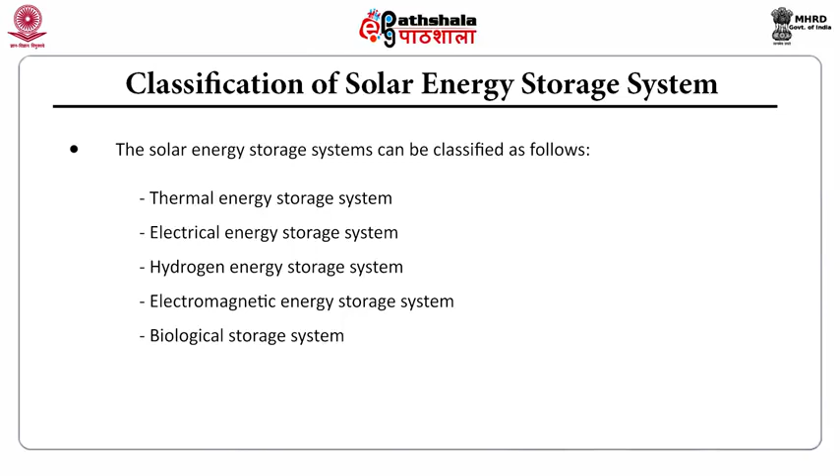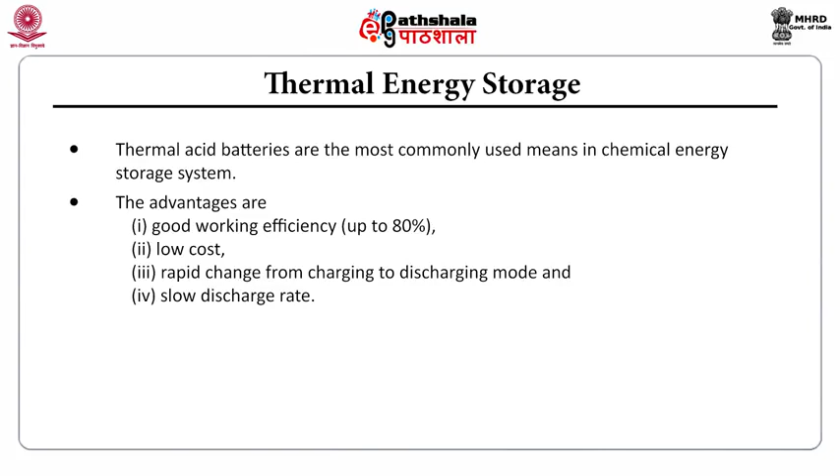There are different types of solar energy storage system. It can be classified as thermal energy storage system, electrical energy storage system, hydrogen energy storage system, electromagnetic energy storage system, and biological storage system. Thermal energy storage system. The lead acid batteries are the most commonly used means in chemical energy storage system. The advantages of this storage are good working efficiency up to 80%, low cost, rapid change from charging to discharging mode, and slow discharge rate.

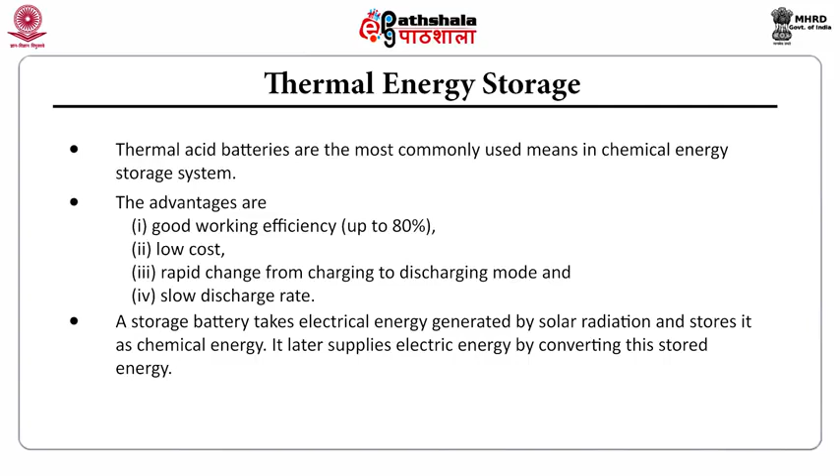A storage battery takes electrical energy generated by solar radiation and stores it as chemical energy. It later supplies electric energy by converting this stored energy. Electrical energy storage. A capacitor is used to store electrical energy in an electrostatic field when it is charged. A capacitor of large capacity is required to store a significant amount of energy. Hydrogen energy storage. The electrical energy is used to decompose water, splitting the water by the electrolysis reaction into hydrogen and oxygen. These substances can be combined to release the stored energy when required.

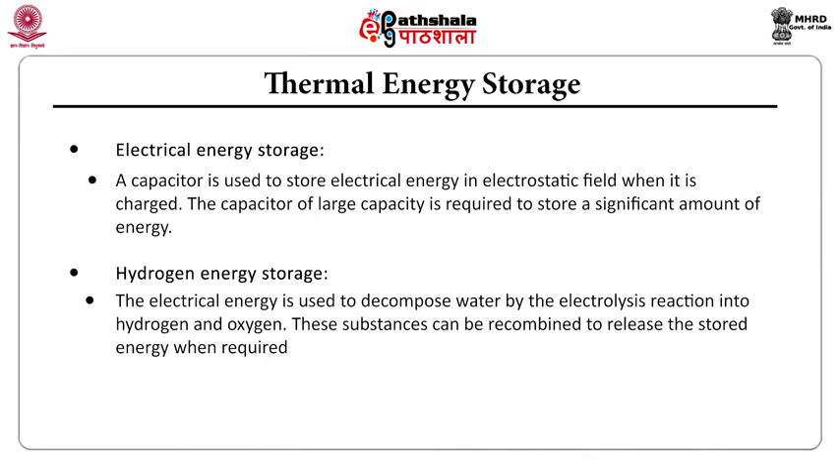Electromagnetic energy storage. The electrical energy is used to store energy in a magnetic field. The resistance of the coil wire is made almost negligible so that the stored energy in the coil is not dissipated, and stored energy in the magnetic field can be maintained indefinitely. The electromagnetic energy storage requires the use of superconducting materials. These materials develop almost zero resistance to electricity flow when cooled below a critical or transition temperature. This method is also known as superconducting magnetic energy storage. And the electric energy can be recovered when the coil is discharged.

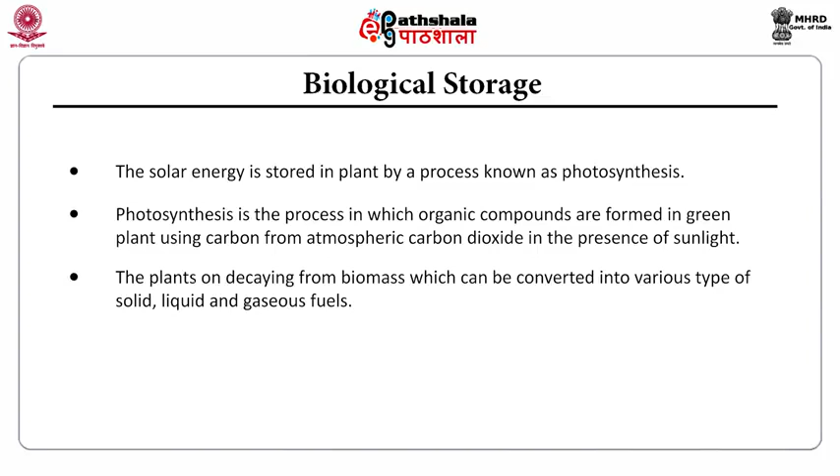Biological storage refers to solar energy stored in plants by the process of photosynthesis. It's the process in which organic compounds are formed in green plants or green algae using carbon from atmospheric carbon dioxide in the presence of sunlight. The decaying plants from this biomass can be converted into various types of solid, liquid and gaseous fuels.

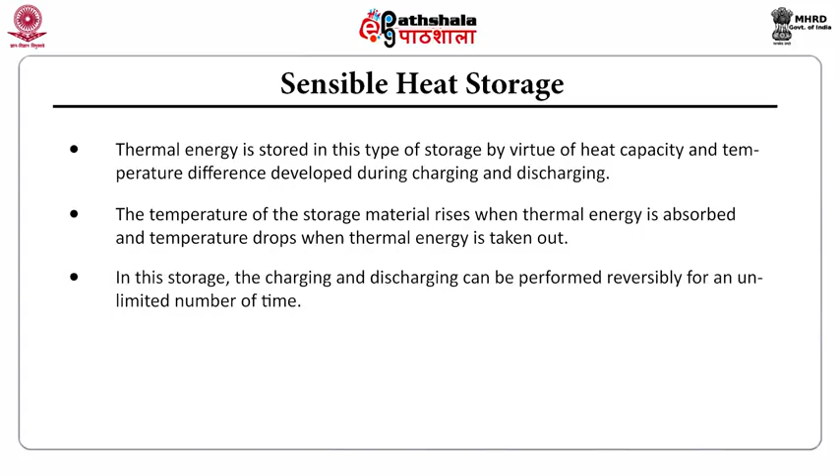Sensible heat storage. The thermal energy is stored in this type of storage by virtue of heat capacity and temperature difference developed during charging and discharging. The temperature of the storage material rises when thermal energy is absorbed and drops when thermal energy is taken out. In this storage, the charging and discharging can be performed reversibly an unlimited number of times. The sensible heat storage can be liquid media storage or solid media storage.

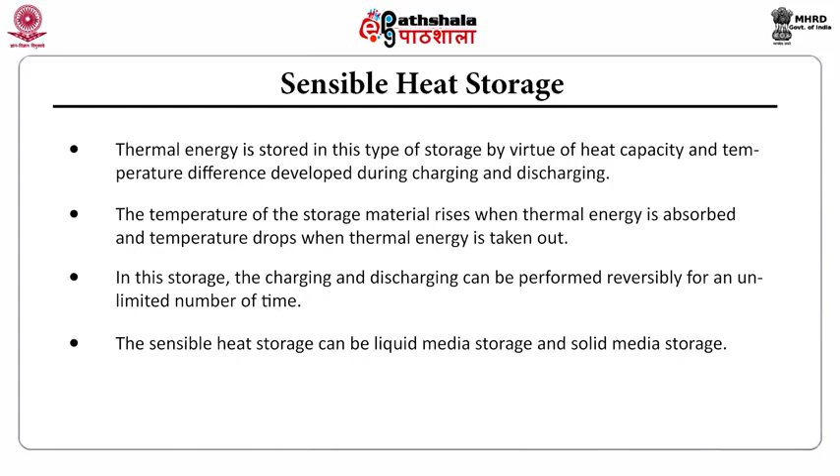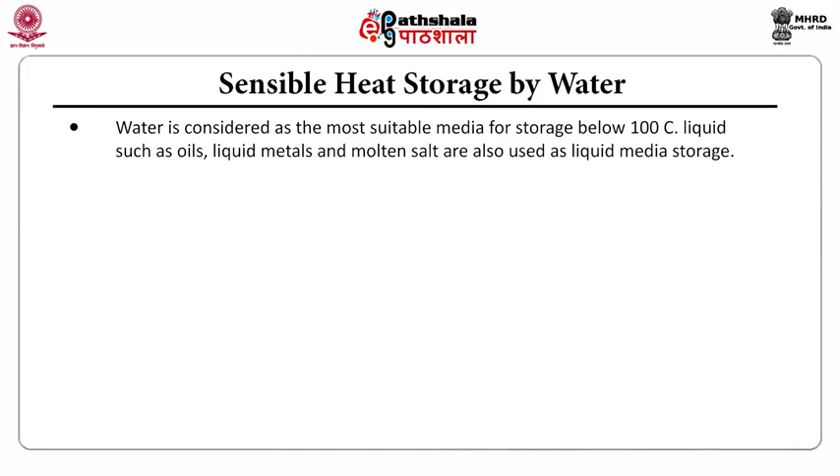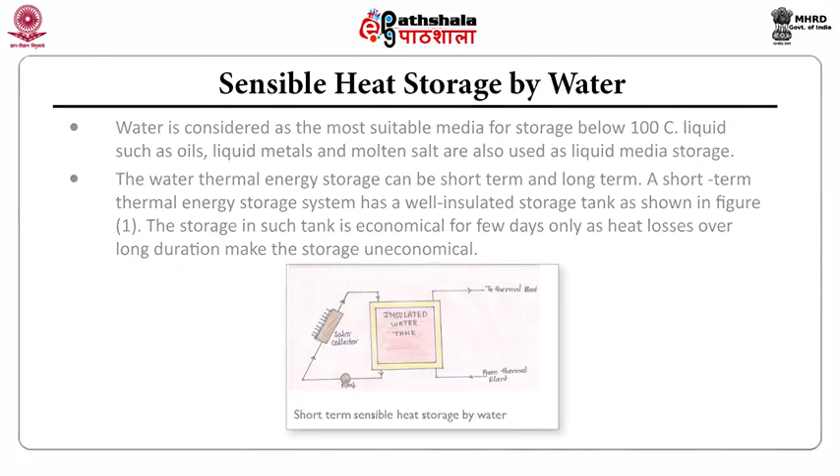We will see the sensible storage of heat by water. Water is considered the most suitable media for storage below 100 degrees Celsius. Liquids such as oil, liquid metals and molten salt can also be used as liquid media storage. Water thermal energy storage can be short-term and long-term. A short-term storage system has a well-insulated storage tank as shown in this figure. Storage in such a tank is economical for a few days only, as heat is lost over long durations, making the storage uneconomical. Long-term sensible heat storage by water is possible in underground reservoirs having special insulation.

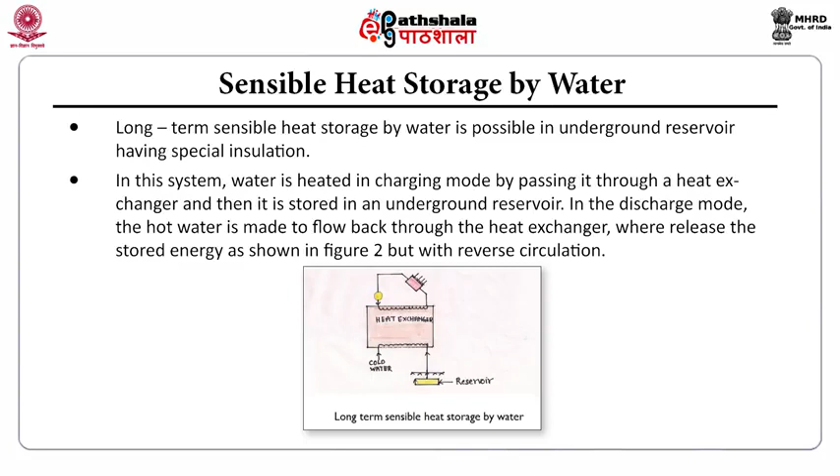In this system, water is heated in charging mode by passing it through a heat exchanger and then it is stored in an underground reservoir. In the discharge mode, the hot water is made to flow back through the heat exchanger where it releases the stored energy as shown in this figure, but with the reverse circulation.

And the advantages of this storage system are: abundantly available, inexpensive, high specific heat which enables to store more heat per unit mass, low viscosity requiring less energy to pump through the pipe system, can be used for both storage and working medium, and is stable with no harmful effect.

But disadvantages are it has limited temperature range of 0 to 100 degrees Celsius, it results in corrosion of pipes and can leak easily as it has less surface tension.

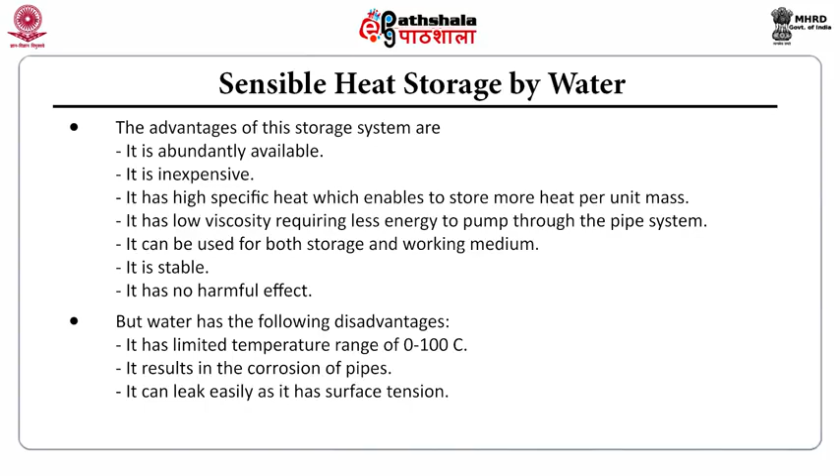Solid media storage or packed media storage. This type of storage has a bed of loosely packed solid materials such as rocks, sand, concrete, pebbles and metals to store sensible heat. A fluid such as air is circulated through the bed to remove the heat from the storage.

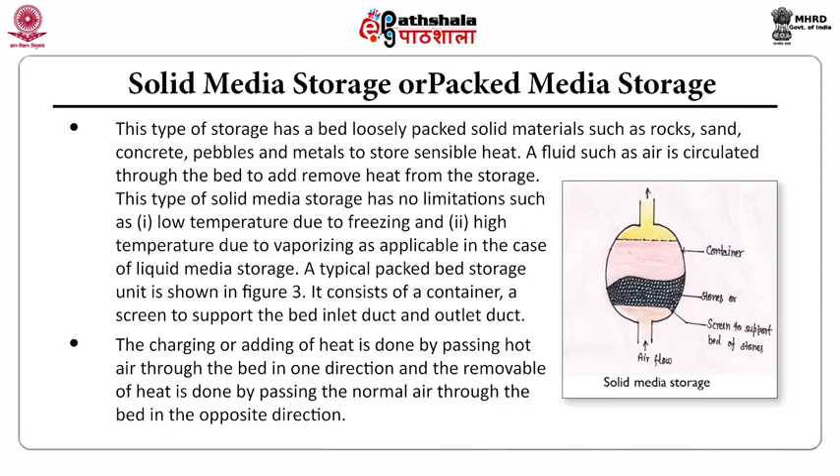The advantages of this solid media storage are: the stones or pebbles are abundantly available, low cost, non-combustible, easy to handle, the possibility of high storage temperature, no freezing point during the heat removal, no corrosion problem, no requirement of a heat exchanger. But it has disadvantages like the size of the storage container is large, simultaneously charging and discharging of energy is impossible in this media, and large pressure drop needs a high capacity air blower.

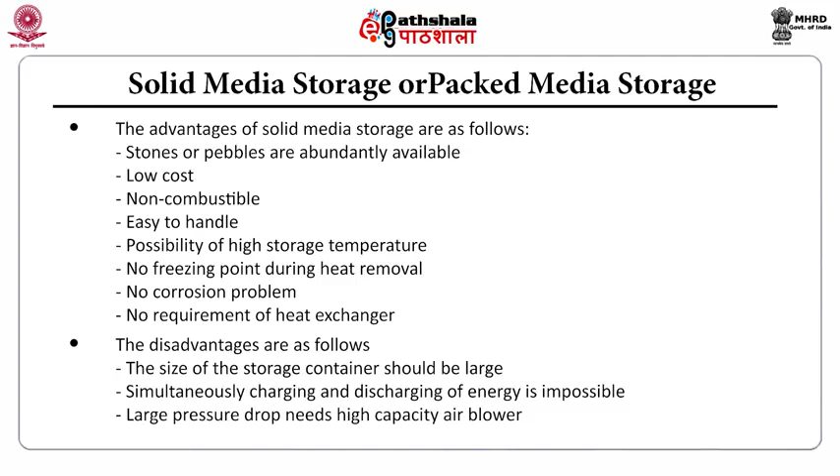Latent heat storage. In this storage, heat energy is stored by virtue of latent heat, which is required to bring about phase change of the storage medium. The heat required to bring about phase change of a material is much larger compared to the sensible heat change of the same material. The phase change of a material also involves absorption or release of a large quantity of heat energy at a constant temperature, which is impossible in the case of sensible heating. Therefore, latent heat storage system is more compact for a certain heat storage compared to sensible heat storage.

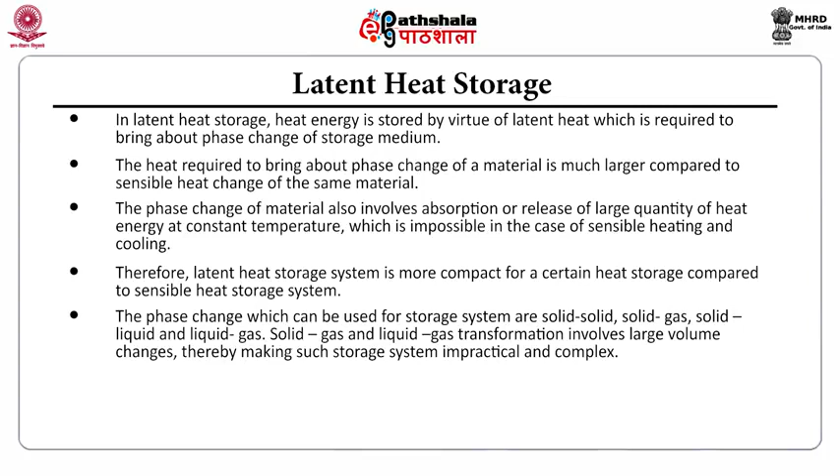The phase changes which can be used for storage systems are solid-solid, solid-gas, solid-liquid and liquid-gas. Solid-gas and liquid-gas transformations involve large volume changes, thereby making these systems impractical and most complex. But solid-solid transition involves transformation of the material from one crystalline form to another, thereby resulting in the transformation with small volume changes. Hence, such storage systems are practical and preferred in spite of small changes in latent heat possible during this transformation.

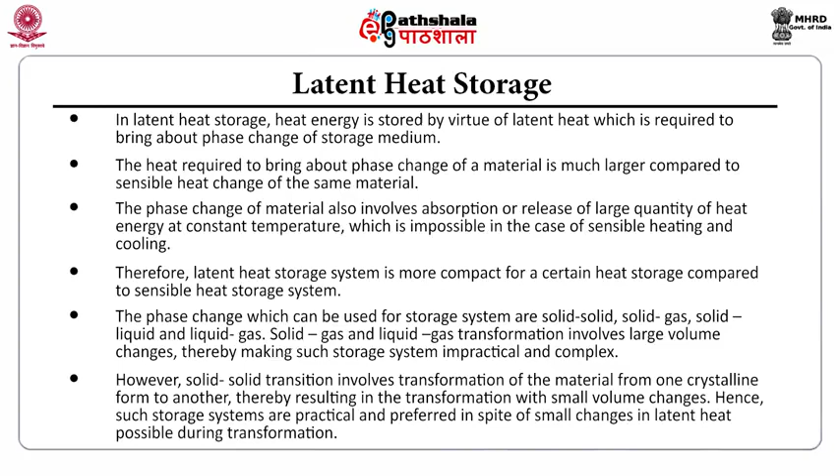For the phase change storage media, salt hydrates called Glauber's salt, that is Na2SO4·10H2O, are preferred. These have solid-liquid transformation. Besides these hydrates, paraffins and non-paraffins like esters, fatty acids, alcohols and glycols are used for this storage. The hydrate crystals have water of crystallization and can be represented as XYn·mH2O. That is, one atom of X, n atoms of Y and m molecules of water in one crystal.

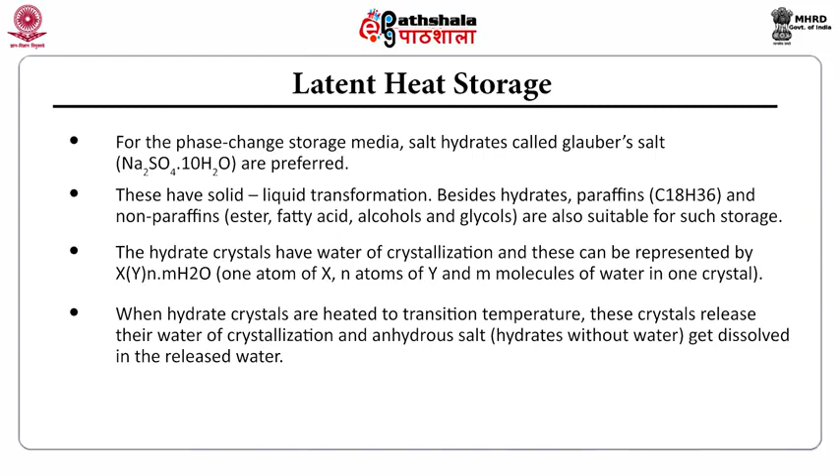When the hydrate crystals are heated to transition temperature, these crystals release their water of crystallization and the anhydrous salt, that is hydrates without any water, gets dissolved in the released water. But the problems faced with the use of salt hydrates for latent heat storage are: released water of crystallization is insufficient to dissolve all the solid salt produced on heating. The anhydrous salt settles down at the bottom of the container. Recrystallization becomes impossible on removal of heat. The process becomes irreversible and performance degradation takes place.

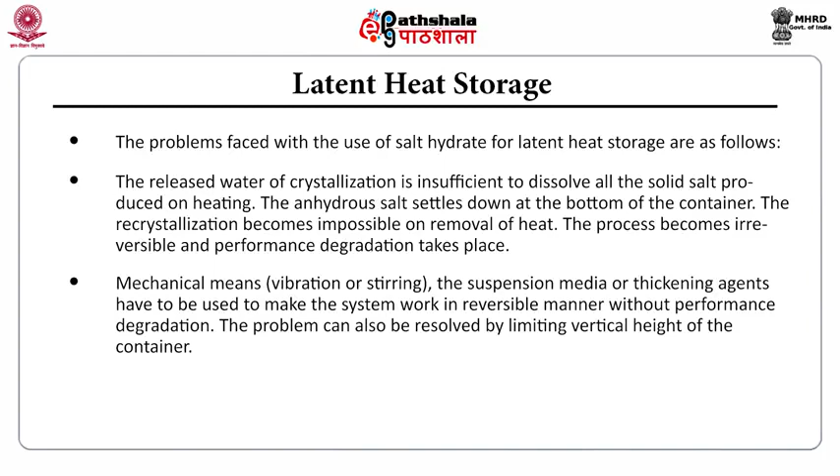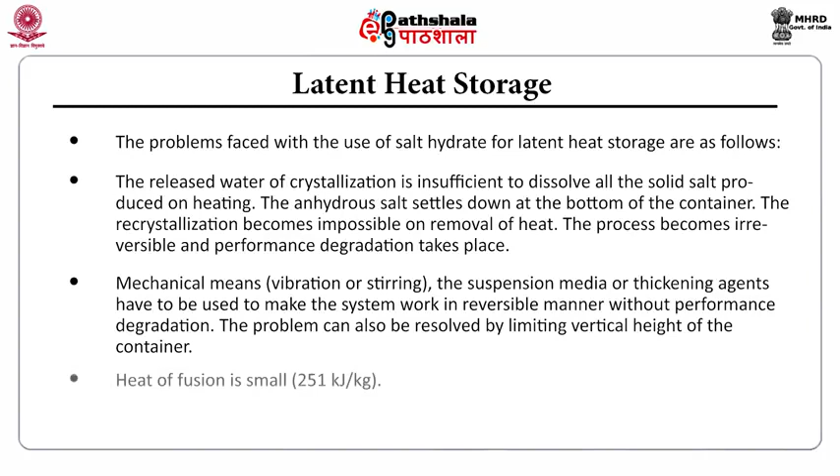Mechanical means like vibration or stirring, or suspension media or thickening agents have to be used to make the system work in a reversible manner without performance degradation. And this problem can also be resolved by limiting the vertical height of the container. And also the heat of fusion is small in this type of storage.

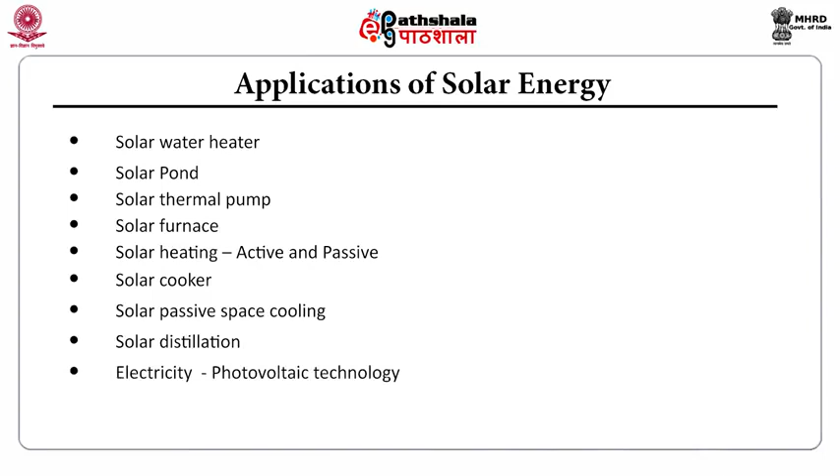Now coming to the applications of solar energy. The applications include solar water heater, solar pond, solar thermal pump, solar furnace, solar heating, active as well as passive, solar cooker, solar passive space cooling, distillation and electricity production by photovoltaic technology.

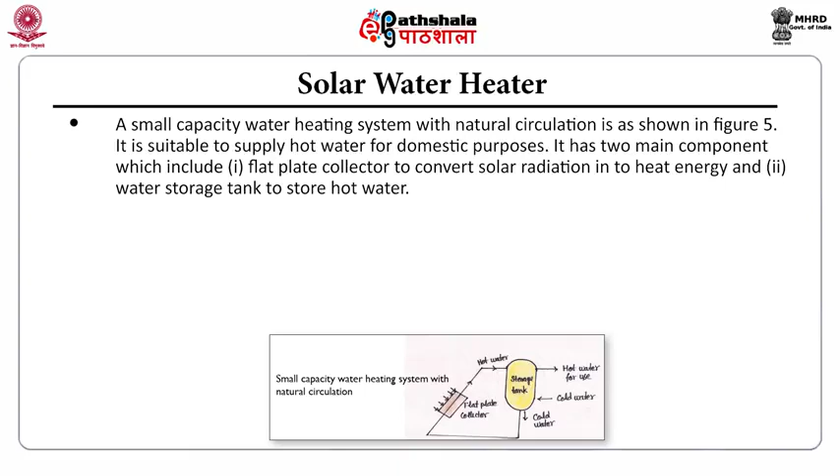The solar water heater. A small capacity water heating system with natural circulation is shown in this figure. It is suitable to supply hot water for domestic purposes. It has two main components, which include a flat plate collector to convert solar radiation into heat energy, and a water storage tank to store hot water. The tank is located above the level of the collector.

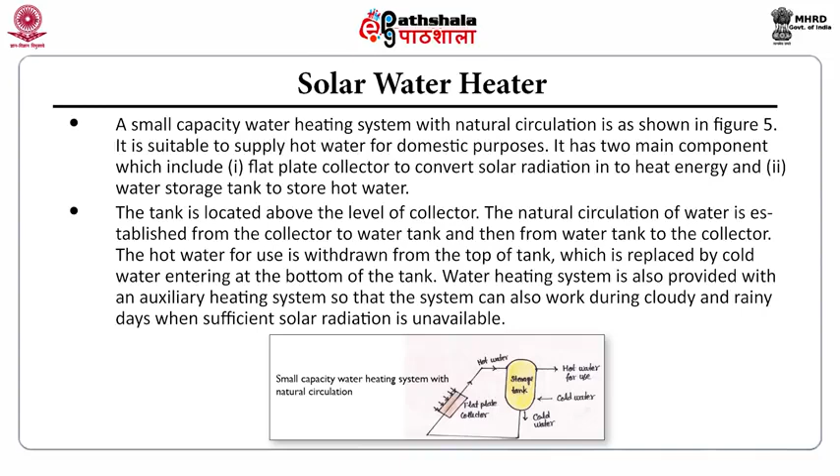The natural circulation of water is established from the collector to the water tank and then from the water tank to the collector. The hot water for use is withdrawn from the top of the tank, which is replaced by the cold water entering at the bottom of the tank. The water heating system is also provided with an auxiliary heating system so that the system can also work during cloudy and rainy days when sufficient solar radiation is unavailable.

Solar pond. In ordinary ponds, when water is heated up by the sun rays, the heated water rises to the top of the pond. The hot water loses heat to the atmosphere, and so the net temperature at the top of the pond remains nearly at atmospheric temperature. The solar pond technology ensures that heated brine water remains at the bottom of the pond due to more brine concentration and density in it. The solar pond serves the dual purposes of a large flat collector and a thermal storage system.

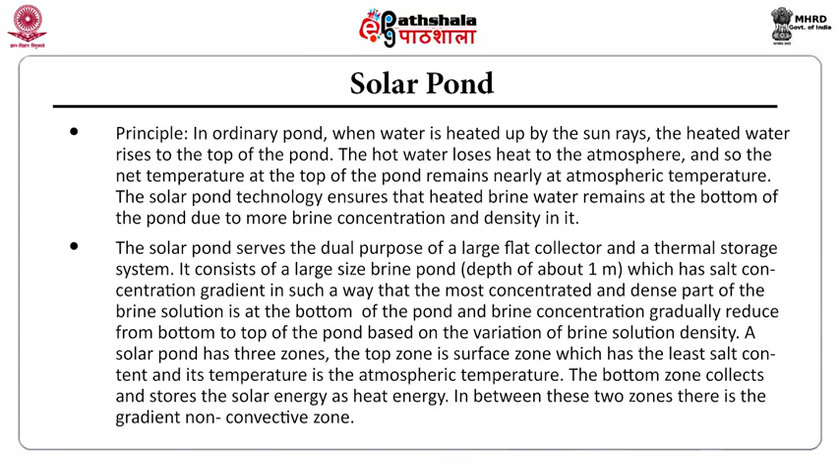It consists of a large brine pond, with a depth of about 1 meter, which has a salt concentration gradient in such a way that the most concentrated and dense part of the brine solution is at the bottom of the pond, and brine concentration gradually reduces from the bottom to the top of the pond based on the variation of brine solution density. A solar pond has 3 zones. The top zone is the surface zone, which has the least salt content and its temperature is the atmospheric temperature. The bottom zone collects and stores the solar energy as heat energy. In between these two zones, there is the gradient non-convective zone.

The hot brine solution from the bottom of the solar pond is taken out without disturbing the brine gradient existing in the solar pond. This solution is taken to a heat exchanger, used to run the turbine, which is coupled to a generator to generate the power. The refrigerant vapors exiting from the outlet of the turbine are condensed to liquid state in a condenser and pumped to the heat exchanger. The solar pond electric power plant is given in this figure.

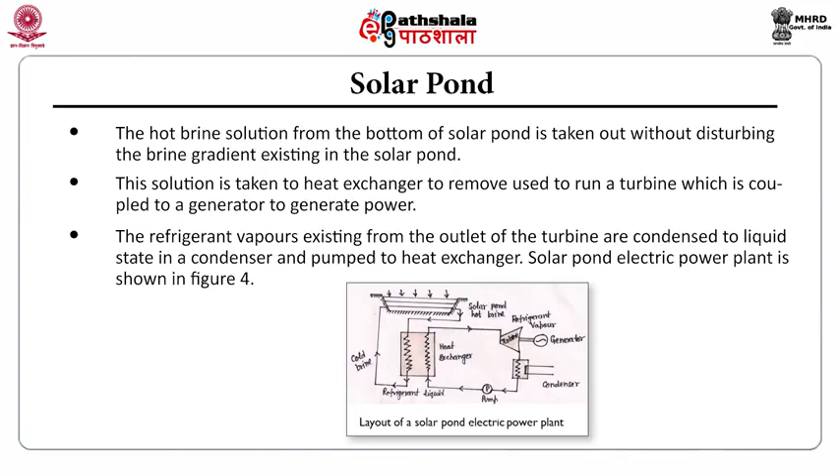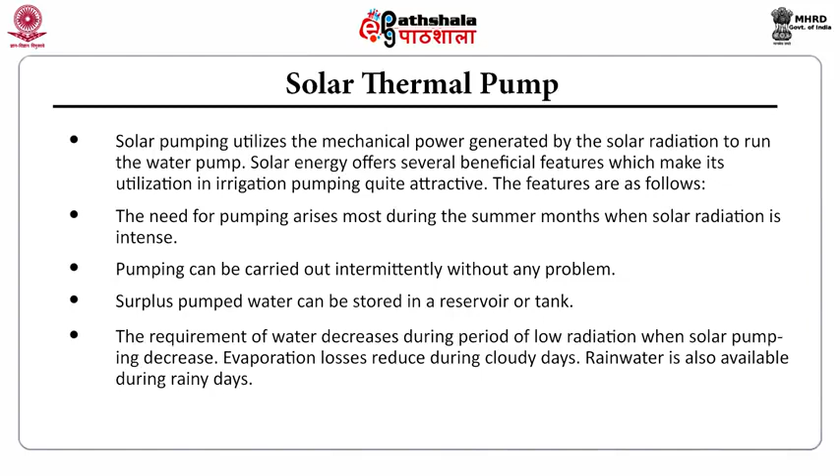Solar thermal pump. Solar pumping utilizes the mechanical power generated by the solar radiation to run the water pump. Solar energy offers several beneficial features for its utilization in irrigation pumping. The need for pumping arises most during the summer months when solar radiation is intense. Pumping can be carried out intermittently without any problem. Surplus pumped water can be stored in a reservoir or tank. The requirement of water decreases during periods of low radiation when solar pumping decreases. Evaporation losses reduce during cloudy days. Rainwater is also available during the rainy days. There is relatively inexpensive running and maintenance cost.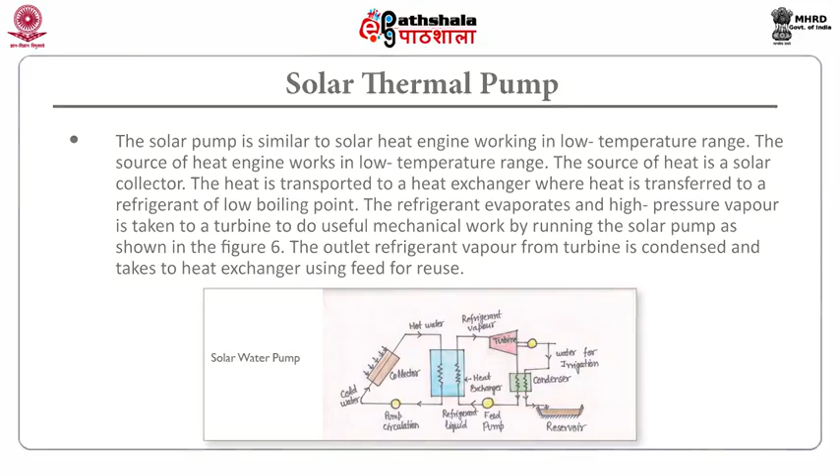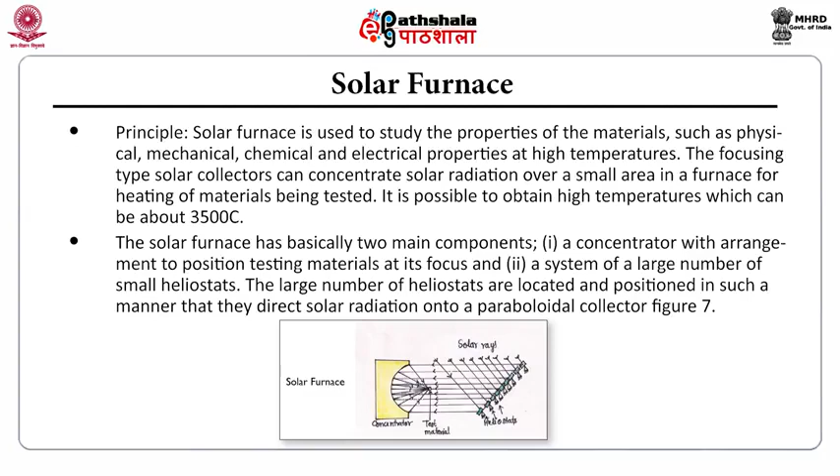Solar furnace is used to study the properties of materials, such as physical, chemical, mechanical and electrical properties, at high temperature. The focusing type solar collectors can concentrate solar radiation over a small area in a furnace for heating of materials. It is possible to obtain high temperatures, which can be about 3500 degrees Celsius. The solar furnace has two main components: a concentrator with arrangement to position the materials in focus, and a system of a large number of small heliostats. The heliostats are located and positioned in such a manner that they direct solar radiation to the paraboloidal collector, as given in this figure.

The solar radiation after reflection from the heliostats moves parallel to the optical axis of the concentrator. The heliostats are provided with a system of sun tracking. The concentrator focuses incoming solar rays on the test material to heat it up. The solar furnace is mainly used during the sunshine hours. Here the cost of equipment is very high and only material with a small area can be heated and tested. These are the limitations of the solar furnace.

The major application of solar energy is solar heating. It can be passive or active solar heating. Passive solar heating is a method of heating with solar energy that does not require mechanical power to circulate heat. Instead, structural designs are used that help to absorb solar energy and allow the heat to circulate by natural convection.

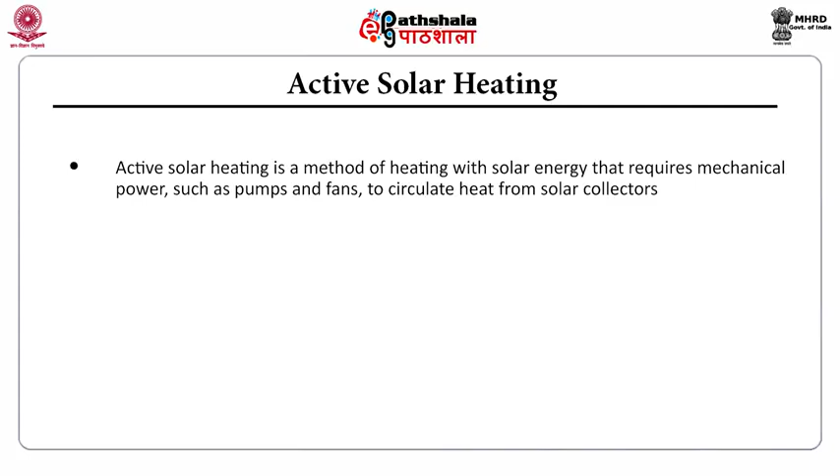Active solar heating is a method of heating with solar energy that requires mechanical power such as pumps and fans to circulate the heat from the solar collector. The solar collector collects the solar radiation; tubes filled with liquid that lie on the metal plate are heated up. This is connected to pipes that carry the liquid through a building.

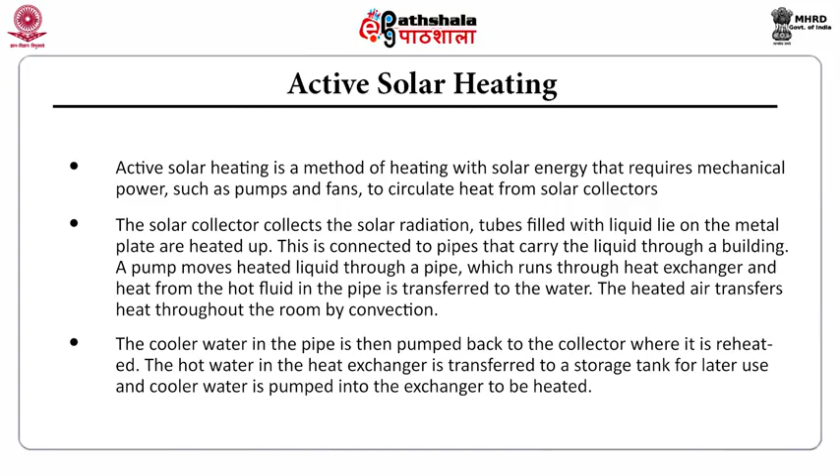A pump moves heated liquid through a pipe which runs through the heat exchanger, and heat from the hot fluid in the pipe is transferred to the water. The heated air transfers heat throughout the room by convection. The cooler water in the pipe is then pumped back to the collector where it is reheated. The hot water in the heat exchanger is transferred to a storage tank for later use, and cooler water is pumped into the exchanger to be heated.

Solar passive heating. Solar energy can be used for the passive heating of buildings to maintain comfortable temperature inside the buildings. Passive heating of buildings does not require any mechanical device. This heating consists of natural processes such as convection, radiation and conduction designed to ensure natural flow of heat in the space inside the building. Such a specially designed building is called a solar house.

In the northern hemisphere, the sun rays come from the south direction. Hence, in order to achieve solar passive heating in cold regions, the south facing wall is made thick using concrete or stone to store the maximum heat energy from the incident solar radiation. The entire south wall is further provided with a plastic or glass sheet covering with an air gap in between the wall and the sheet covering.

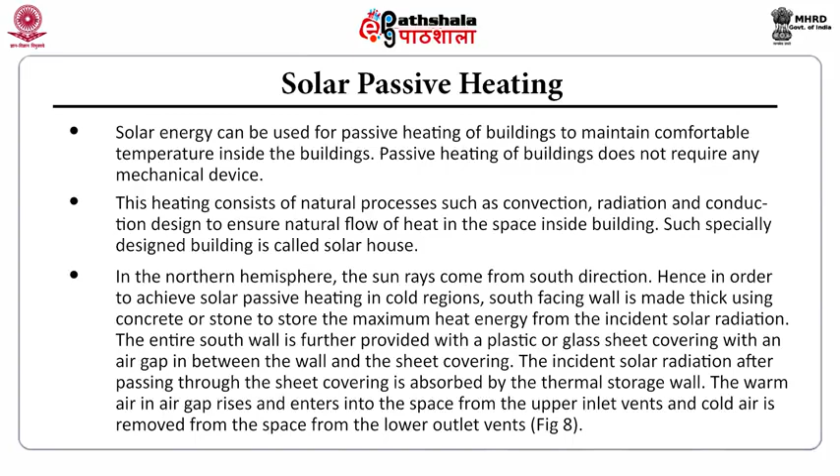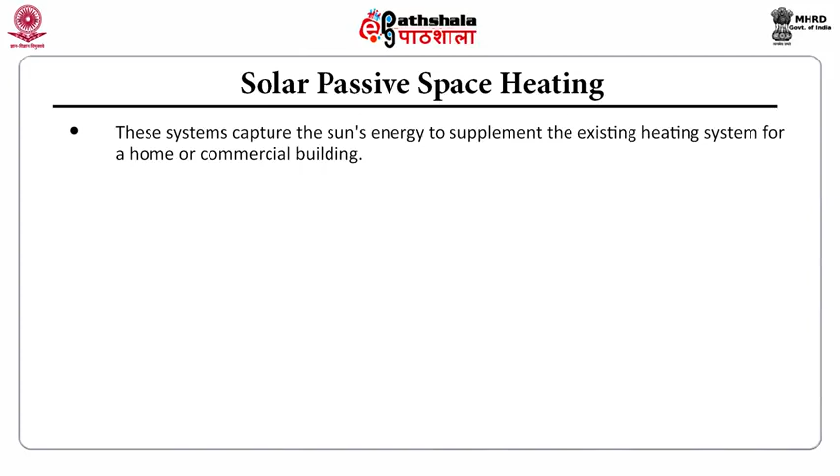Solar passive space heating. These systems capture the sun's energy to supplement the existing heating system for a home or commercial building. The heating system intensifies the sun's power to heat water or the air that is then used to heat the building.

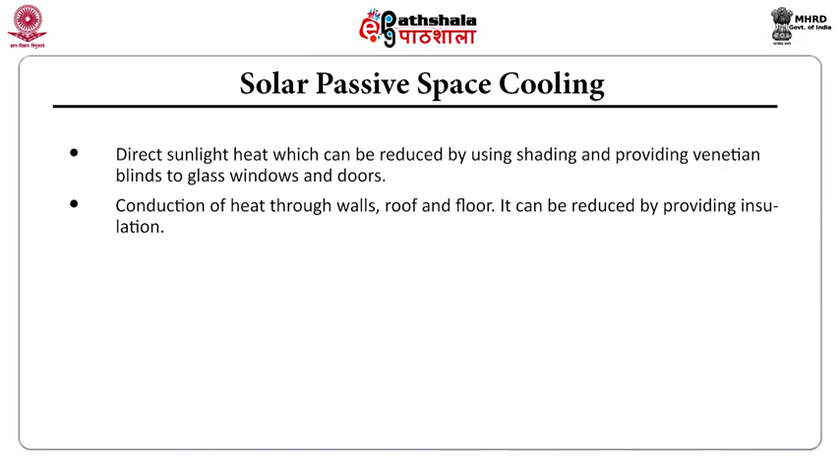Solar passive space cooling. Direct sunlight heat can be reduced by using shading and providing Venetian blinds to glass windows and doors. Conduction of heat through the walls, roof and floor can be reduced by providing insulation. The maximum heat is conducted through the exposed roof, which has to be provided a false ceiling with a good insulating material to reduce the conduction of heat from it.

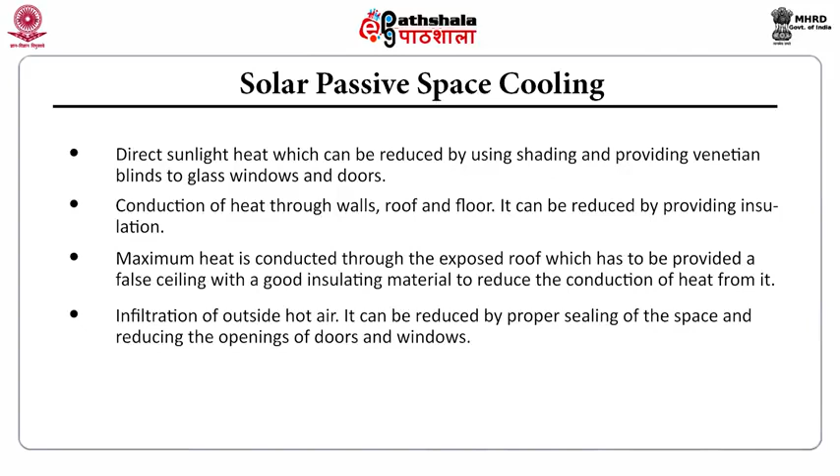Infiltration of outside hot air can also be reduced by proper sealing of the space and reducing the opening of doors and windows. The methods to reduce or prevent heating of the space are shading of glass area and the walls, providing air circulation or ventilation so that warm air is driven out and cool air from the outside is sucked into the space using the chimney effect as given in this figure, and providing a pond on the roof to reduce radiation heating and achieve cooling below the pond.

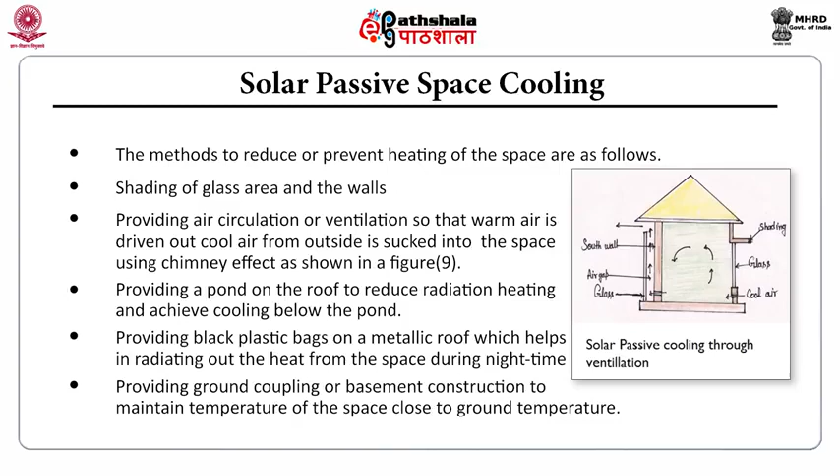Providing black plastic bags on a metallic roof helps in radiating out the heat from the space during night time. Providing ground coupling or basement construction maintains the temperature of the space close to ground temperature.

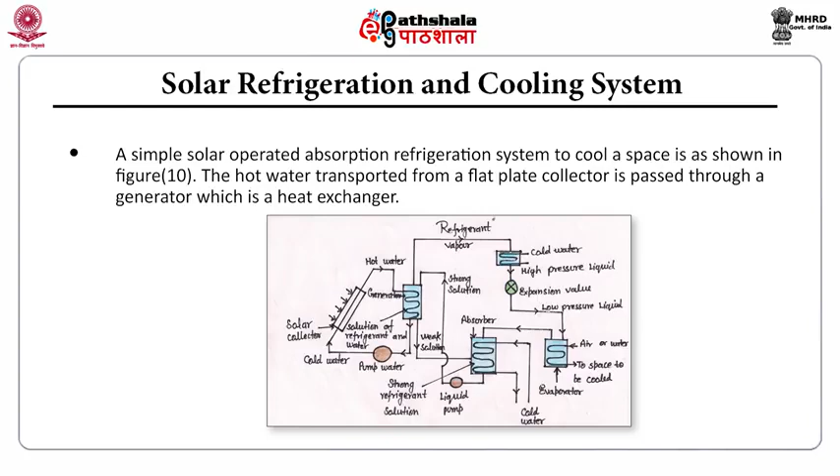Another application is solar refrigeration and cooling system. A simple solar operated absorption refrigeration system to cool a space is given in this figure. The hot water transported from a flat plate collector is passed through a generator, which is a heat exchanger. The heat is transferred to a refrigerant and absorber solution. The refrigerant can be ammonia or water, while the absorber is water or lithium bromide, that generates high pressure refrigerant vapors which are condensed to high pressure liquid in the condenser.

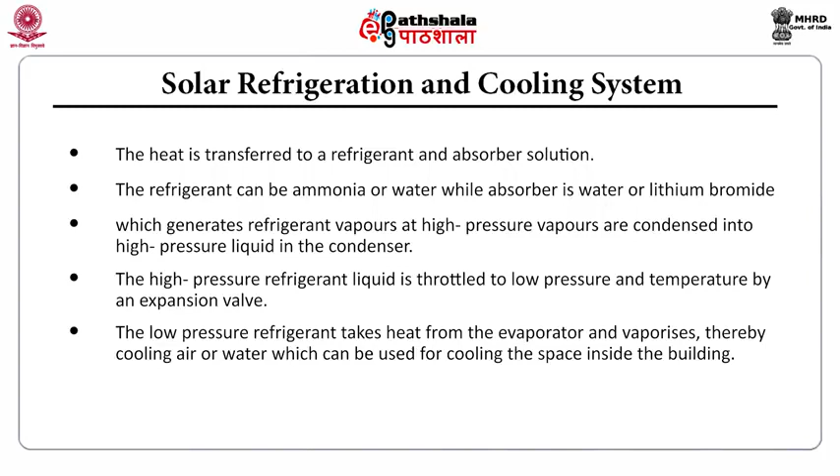The high pressure refrigerant liquid is throttled to low pressure and temperature by an expansion valve. The low pressure refrigerant takes heat from the evaporator and vaporizes, thereby cooling air or water which can be used for cooling the space inside the building.

Another application is the solar cooker. A solar cooker consists of an insulated box of blackened aluminum in which utensils with food materials are kept, a reflector mirror hinged to one side of the box so that the angle of the reflector can be adjusted, and a glass cover consisting of 2 layers of clear window glass sheets. The box is kept in such a way that solar radiation falls directly on the glass cover.

The reflector mirror is adjusted in that way. Additional solar radiation after mirror reflection is also incident on the glass cover. The glass cover traps heat owing to the greenhouse effect, providing more heating effect. The air temperature inside the box ranges from 140 to 160 degrees Celsius, which is enough for boiling and heating purposes.